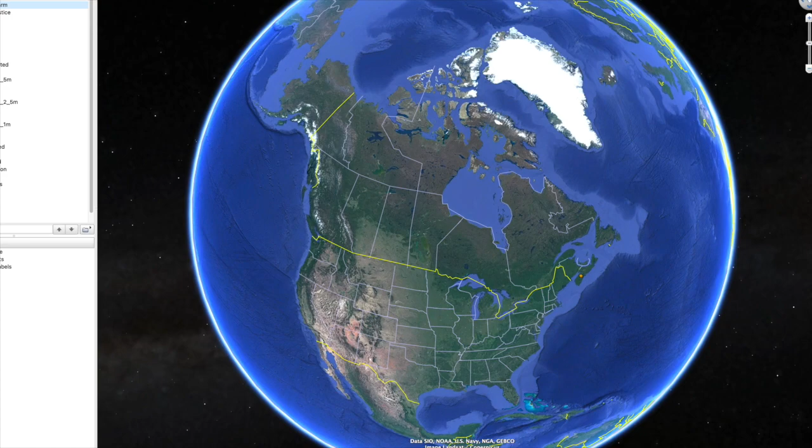All right, so let's take a look at the base map. We purchased a LiDAR map from Mitch. We used 2 important pieces of information to help us design our zones, and those are the watershed path and elevation. Right now you can see about 20-30 acres that are already cleared. The rest are all forested.

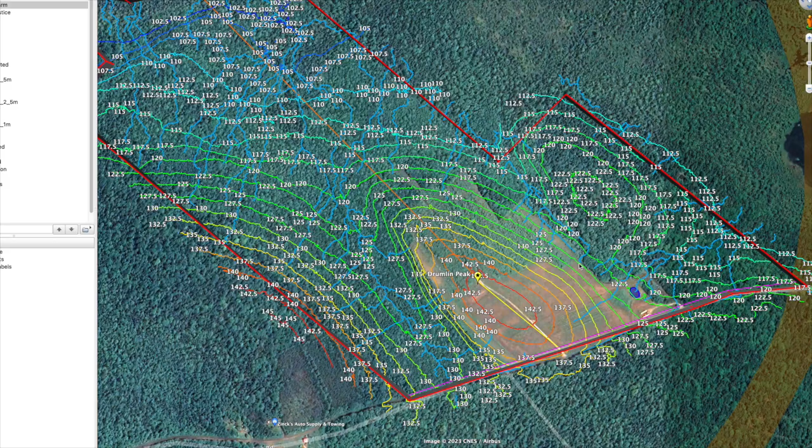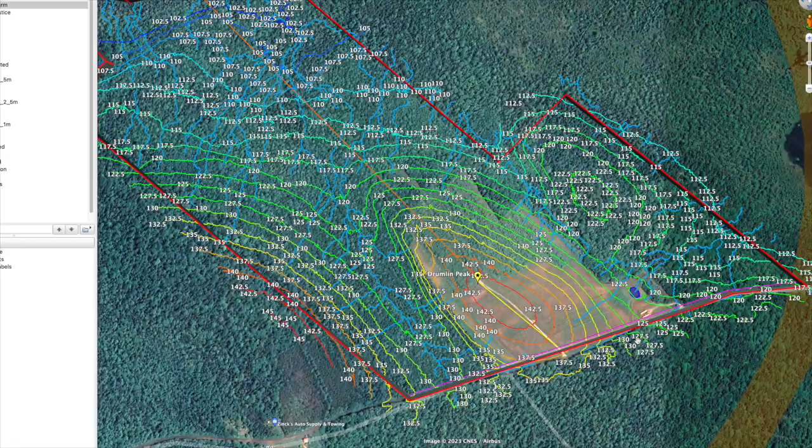Because this is a huge project, we decided to divide it into 3 phases. So for this project, we are only concerned with phase 1, which occupies the southeast corner of this property.

Now let's take a look at the zone analysis. Before we dive into zones, I just want to bring your attention to the elevations. You see a little peak here that is at 122.5 meters, and then from there on we have a gradual slope toward the forest area. Zone 1 is primarily located on the top plateau because we want the water to drain away from the buildings.

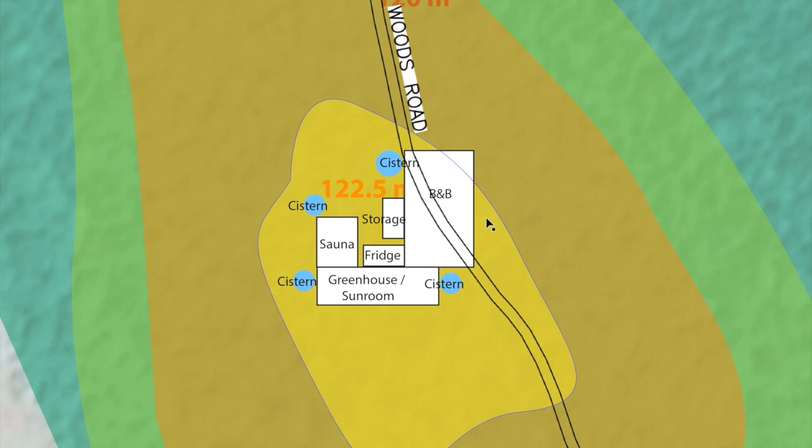Let's just go through some of the elements in Zone 1. As mentioned, we want to have a bed and breakfast building that can accommodate 40 to 50 people, and partially attached to this building is our greenhouse / sunroom / conservatory.

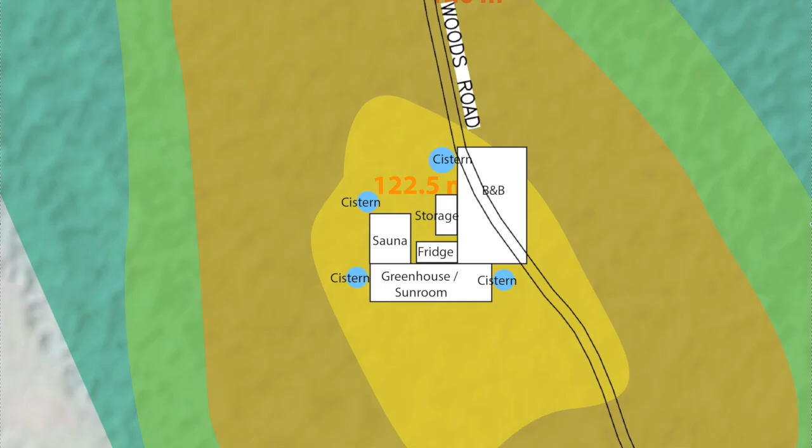This is going to be like an extension of the restaurant where people can dine, have tea, or simply hang out. We also want the sauna to be attached to the greenhouse for a heat recovery reason, which we will explain later when we do a deep dive into the design of the greenhouse.

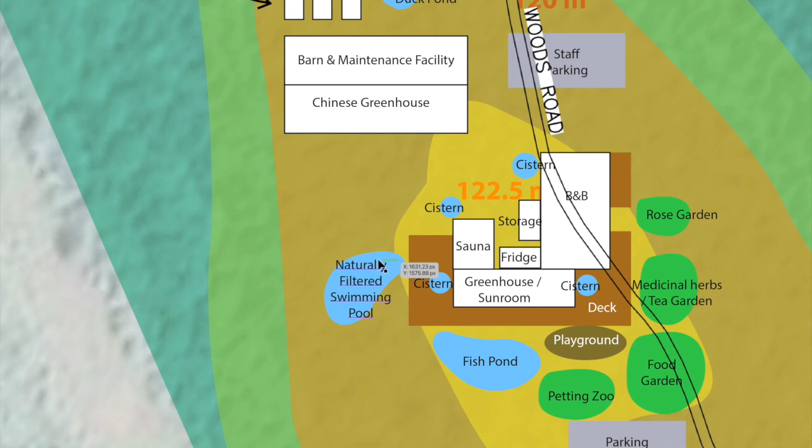Zone 2 is pretty much an extension of Zone 1. We have the deck where people can hang out during the summer. You will also see the playground, the fish pond, petting zoo, food garden, medicinal herbs / tea garden, and rose garden. We also want a naturally filtered swimming pool that's close to the sauna.

A little bit away from Zone 1, we have the much larger Chinese greenhouse for all-year-round food production.

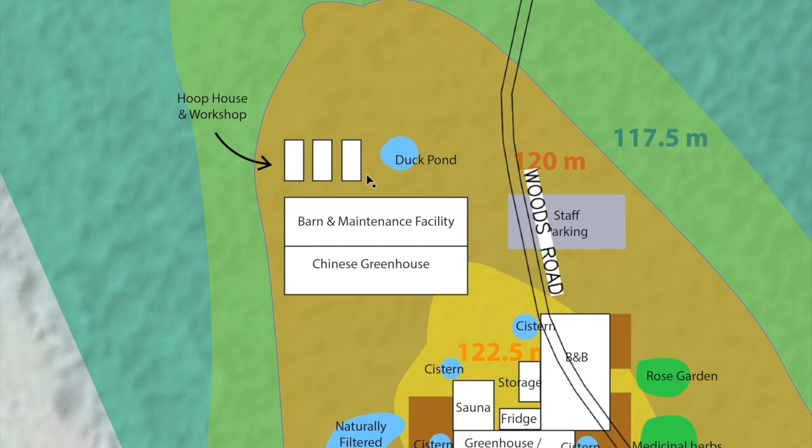Attached to the north side, we have the barn and maintenance facility. Close to the Chinese greenhouse, we have several more hoop houses to help with food production. We have a duck pond close to the animal barn, and we also have parking for staff and guests.

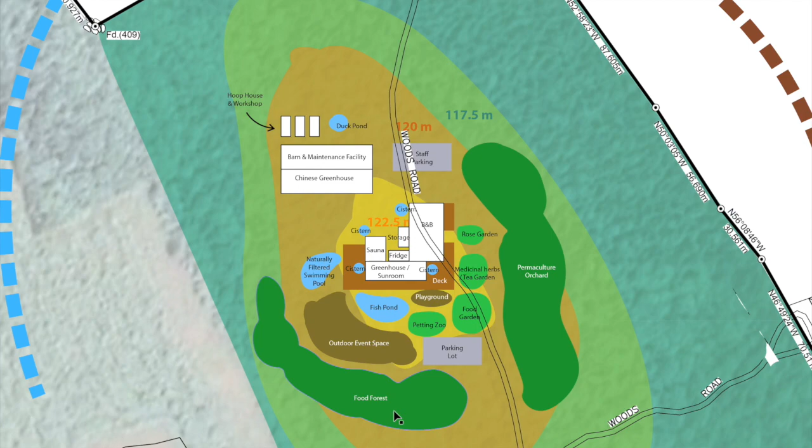Now let's take a look at Zone 3, which is the food forest and permaculture orchard wrapping around the guest-centric area. Lastly, we have Zone 4, the silvopasture that wraps around the animal-centric area.

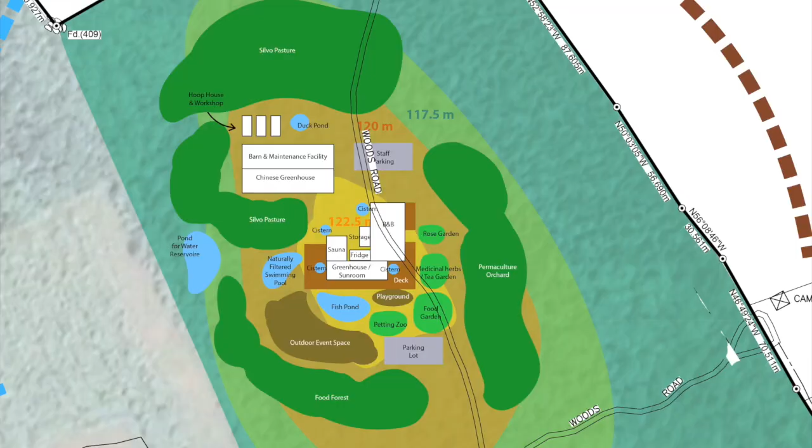When it comes to Zone 4 and beyond, we want to use the property to its full potential, so we're going to create roads so animals can go out in phase 2 and phase 3, allowing us to properly do rotational grazing in the area that's already been cleared and far beyond that.

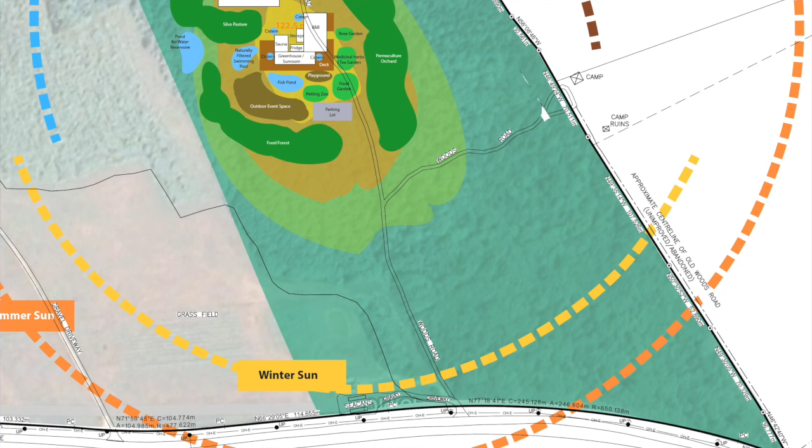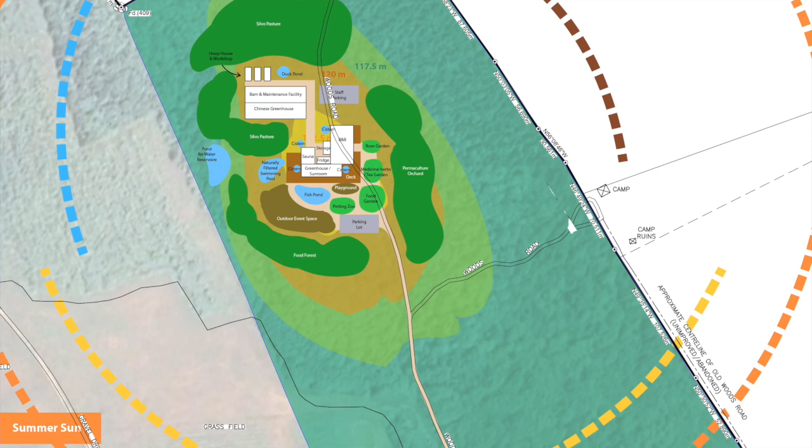Now let's talk about access. We have a huge street frontage spanning around 1 kilometer, and from there the road leads to our property. From here, the access road directs to all the different elements outlined in the zone analysis.

Now let's talk about water. We have a cistern, fish pond, swimming pool, and pond for water reservoir. We have cisterns placed close to the greenhouse, which we can use to irrigate the tropical plants and other culinary plants we plan to house in the greenhouse.

We also want to collect rainwater close to the bed and breakfast because of its large roof surface area, as well as the sauna. These two cisterns will be used to irrigate the Chinese greenhouse.

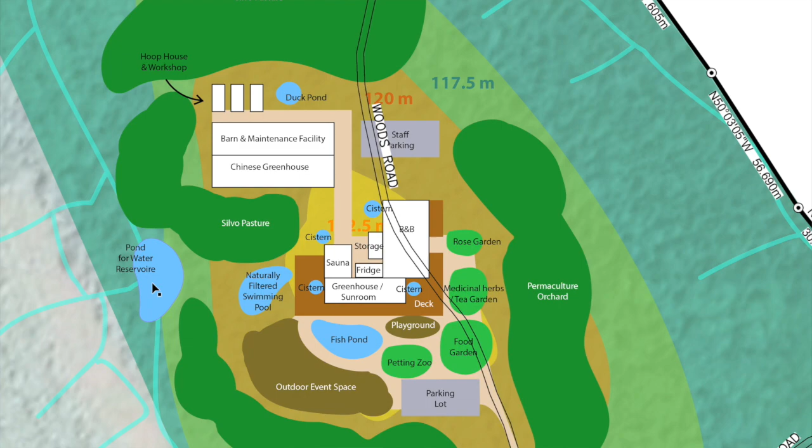We also plan to create a large pond at the bottom of the elevation as a water reservoir. This is strategically placed at the lowest point in phase 1, where it also collects water drained from phase 2, which is altogether at a higher elevation than phase 1. The water can be pumped to water the silvopasture, the food forest, or the Chinese greenhouse when necessary.

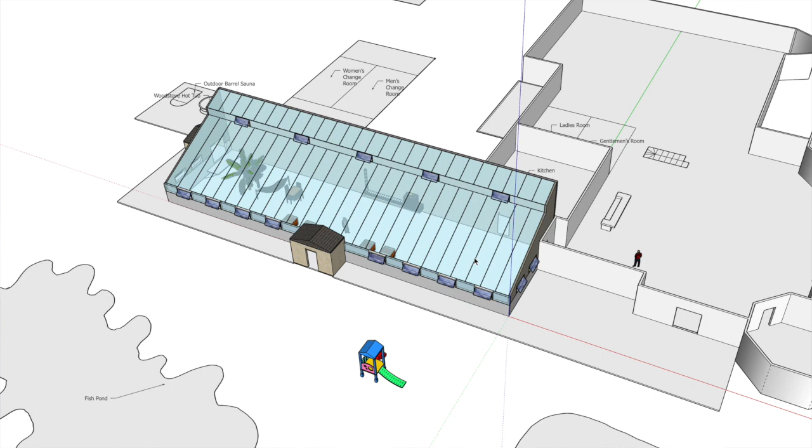Now let's take a deep dive into our greenhouse design. The greenhouse is 8 meters in depth and 30 meters in length. We really want it to be an extension of the restaurant where people can dine, have afternoon tea, or just hang out here.

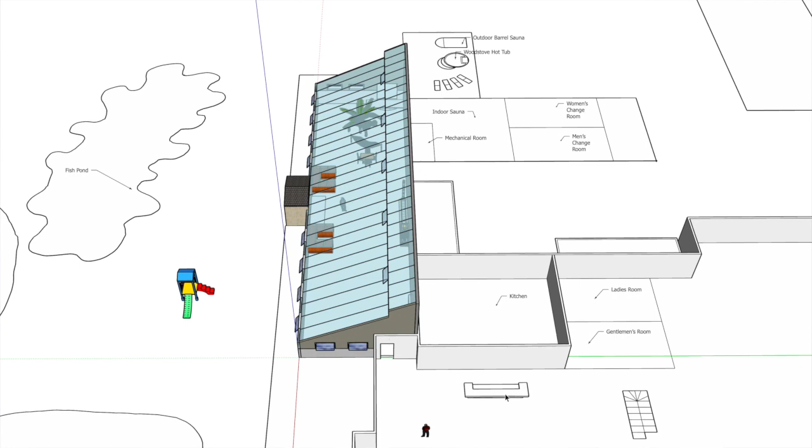This greenhouse is strategically placed to be partially attached to the bed and breakfast because we want the kitchen directly linked to the conservatory so that all the heat can be recovered and channeled into the greenhouse to keep the temperature stable. We also want the kitchen linked to the greenhouse so staff cooking meals can directly serve them from the kitchen to the greenhouse.

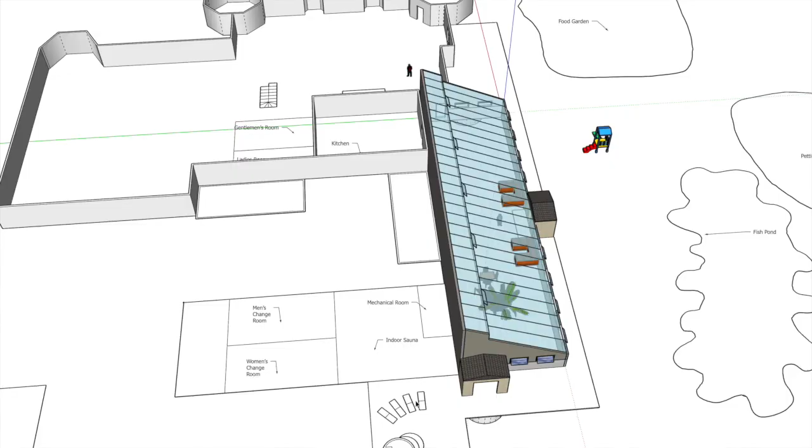The sauna is also attached to the greenhouse because during winter the sauna will be in full operation, something guests will enjoy using all the time, and all that heat generated in the depth of winter will be channeled into the greenhouse to help keep the temperature.

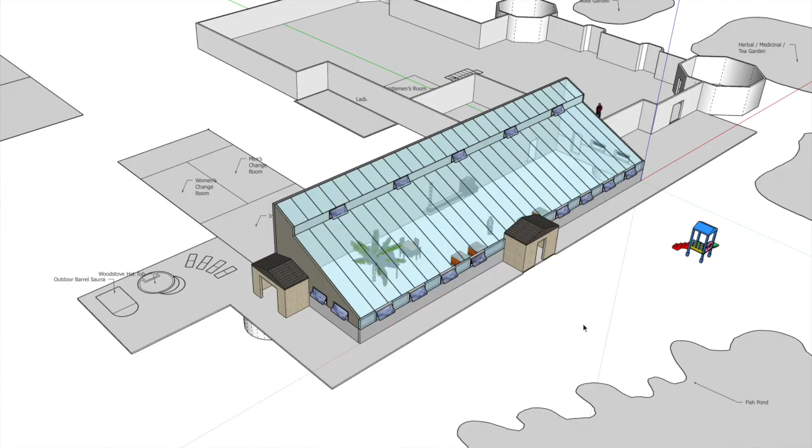Another feature is all the windows placed around the conservatory. We really took Rob's lesson from his greenhouse mini course to heart, which is to ventilate as much as we can, which is healthy for the plants. That's why we planned cross ventilation east to west and lower to upper level.

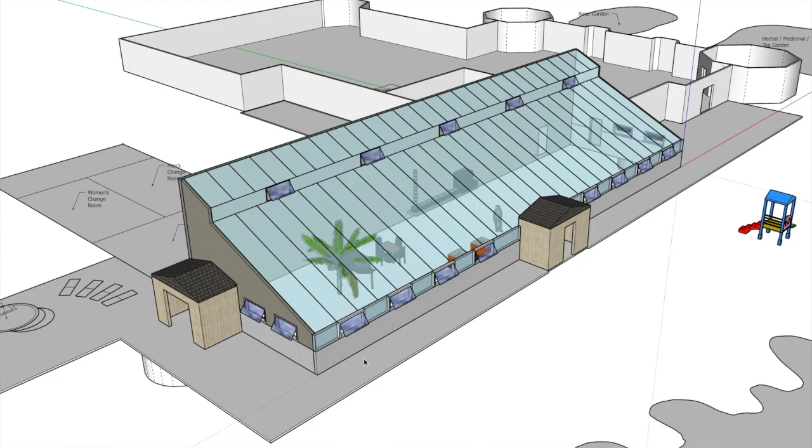Another feature about the greenhouse is its high knee wall. From the bottom here to the top of the window is almost 2 meters. We want our guests to be able to walk around comfortably everywhere in the greenhouse without having to bend their head.

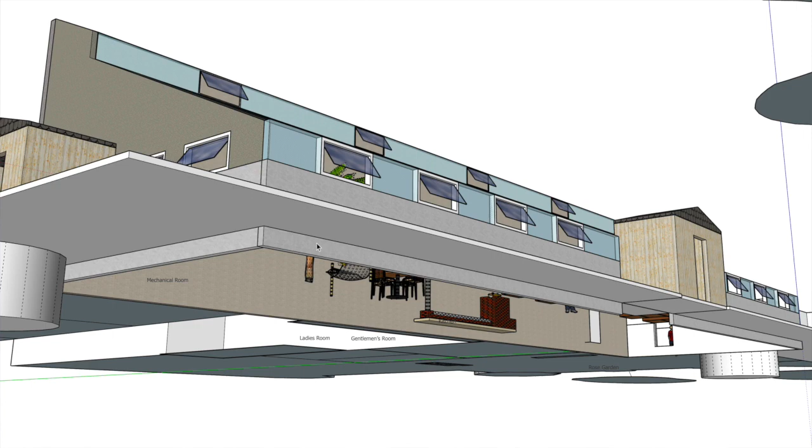We also incorporated a foundation wall beneath the grade to help preserve heat for the soil and also to prevent critters from coming in, and this is below the frost line.

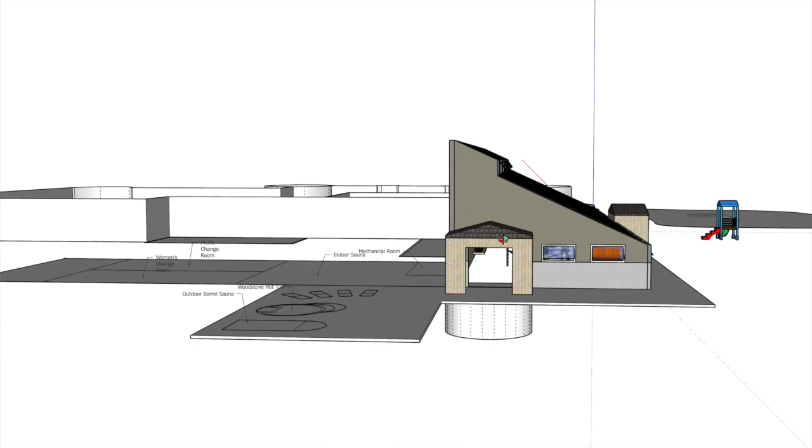Rainwater harvest, as mentioned, will be collected in two cisterns, both at the west and east ends of the greenhouse. In order to further prevent heat loss, we have vestibules wherever doors are concerned—one over here and another one in the center.

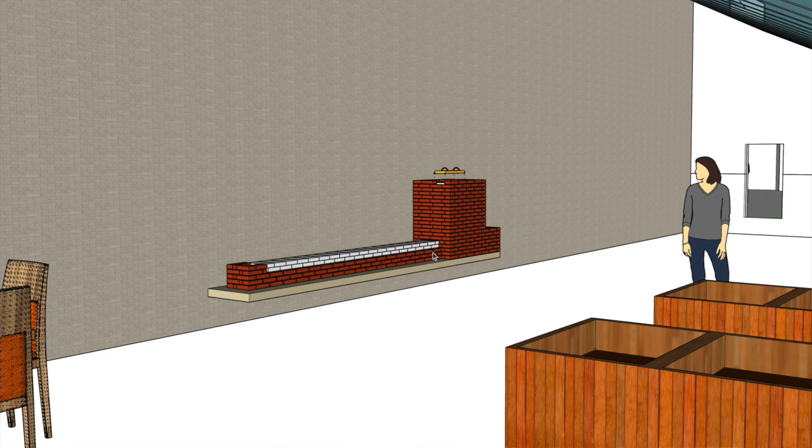When it comes to additional heating for the greenhouse, we've been following the weather for the last couple of years, and this year alone is unheard of—there were a couple of nights dropping to -20. To mitigate for this kind of one-time-per-winter event, we decided to include a rocket stove design, which we'll run with wood trimmings from our own land, so everything stays on our land is used from our land.

So that's pretty much it. We didn't have too much time to get into much detail. I know it's a big project, but we're working diligently on it, and we're happy to be part of the community with you guys. Most likely we'll find a lot of feedback, and we'll be able to provide a lot of feedback to other people, so together we can develop these properties and make the world a better place.